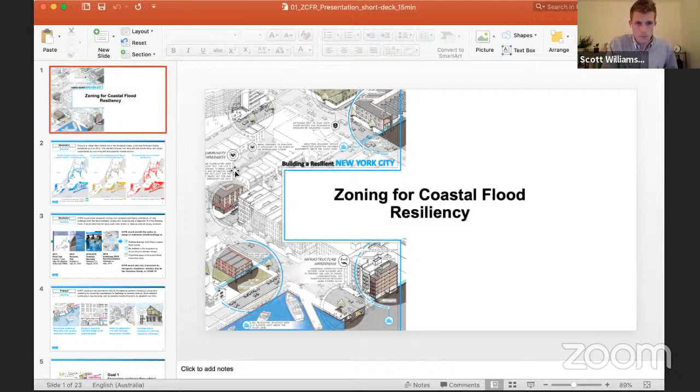When we're analyzing the city's coastal risk, we focus on the area that FEMA designates as the high-risk flood zone, the area that has a 1% chance of risk of being flooded every year.

However, in 2012, Hurricane Sandy awakened us to more widespread flooding that went well beyond the 1% area. Close to half of the properties that are technically classified as being moderate risk of flooding, or having a 0.2% chance of flooding, were inundated as well.

And with climate change, the floodplain will continue to expand. By the 2050s, today's moderate risk flood zone will likely be a high risk flood zone, an area that today is becoming home to almost 1 million New Yorkers. So some widespread implications of this, particularly for where a lot of our city currently lives.

So I suspect a lot of you might want to know how exactly this applies to Community Board 8, and I do have another map for you that I can show you right now. Let me just try and switch over to it for a second, if you bear with me really quickly.

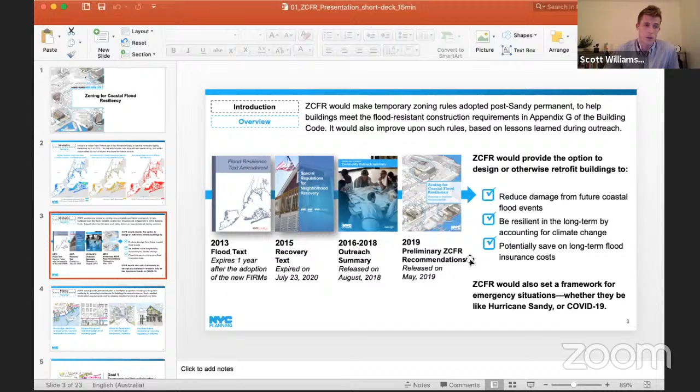So if I can give you a main summary of what this project is seeking to achieve, it's probably this slide, and again we'll make sure it's available to you afterwards. There's sort of 4 goals or pillars that this project is seeking to make changes to the zoning resolution based off of.

Just to go into the depths of that, after a long process of studying the floodplain and engaging with more than 3,000 New Yorkers on a wide set of issues, we were able to establish these 4 overarching goals that help us move from Sandy recovery to a longer-term resiliency strategy.

Firstly, we know that the floodplain community wants to be able to prepare buildings for flooding, even if they are not located in what FEMA determines to be the current high-risk flood zone, especially those located in areas that face moderate risk of flooding and that did experience coastal flooding from Sandy.

Secondly, people also want the option to raise their occupiable space a little higher than the current flood level that FEMA projects. Again, this is because they have seen higher flood levels and expect that risk to grow in the future.

When people are undertaking big investments to retrofit the buildings that they live in, they only want to do that once, understandably. So related to that investment one has to pursue in fully retrofitting to resiliency standards, the third point is important here: residents and business owners are seeking options to invest in resiliency incrementally in some circumstances so that it's more affordable. They want options like moving their mechanical equipment to higher elevations without necessarily triggering a requirement to raise or fully flood-proof the entire structure, which you can understand gets quite costly.

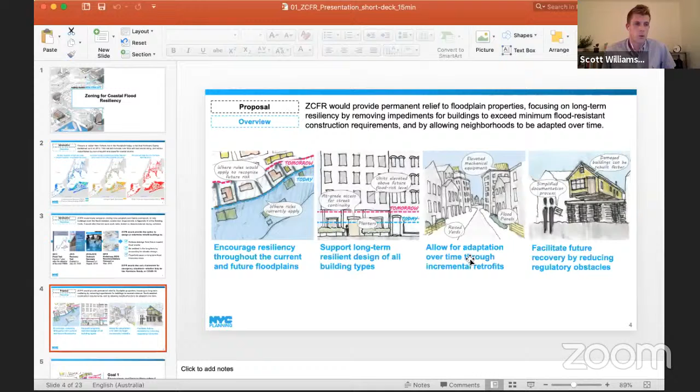So the fourth goal is, after undertaking 2 zoning updates for resiliency, we know that we need a way for the city to be nimbler in responding to future events that might require rebuilding homes or other forms of recovery.

So specifically, the next slides go through those four goals in a little more detail. So bear with me on some of that detail.

Firstly, starting with goal 1, this speaks to the applicability of the proposed regulations. It is important to note that these regulations are optional, and they would facilitate buildings to meet or even exceed flood resistance construction standards set by FEMA and enforced by the city's building code, known as Appendix G.

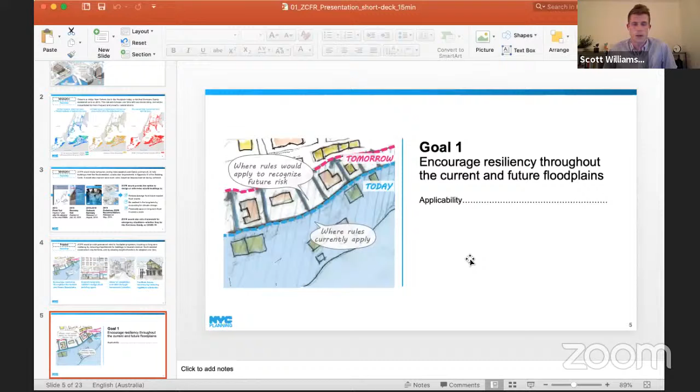Zoning for coastal resiliency would expand the applicability of the current text to a broader set of buildings also exposed to flooding in the event of coastal storms, by allowing any lot located within both the 1% and the 0.2% annual chance floodplains to have access to the proposed special rules that help enable resiliency at the building scale. The 0.2% chance floodplain serves as a proxy for the high-end projection of the 2050s 1% annual chance floodplain.

This allows the city to advance resiliency in the longer term, as it would allow those living in those areas to proactively undertake resiliency improvements, even if they're not yet required to by the building code.

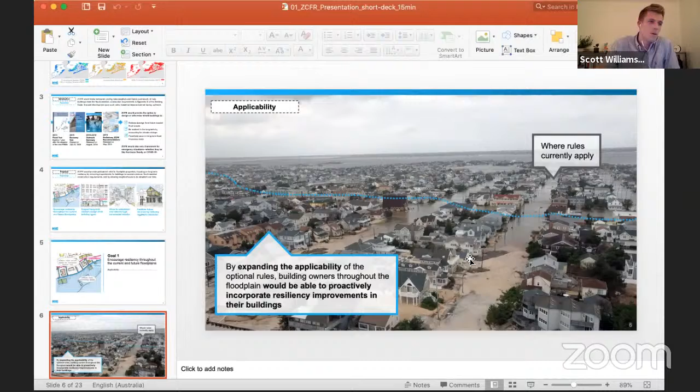Regarding goal 2, this section illustrates regulations that would be available only if the building fully complies with the flood regulations of the building code in Appendix G, and is split into 5 separate subcategories.

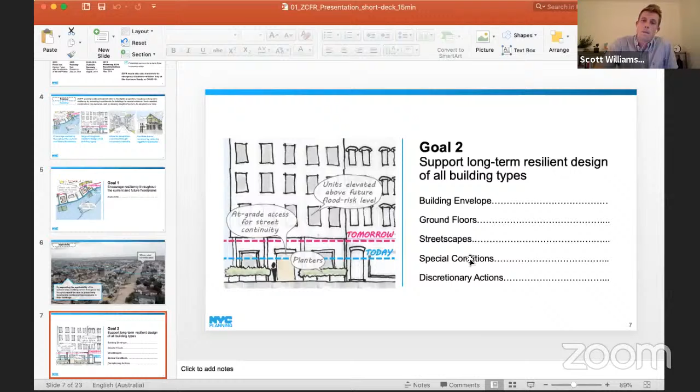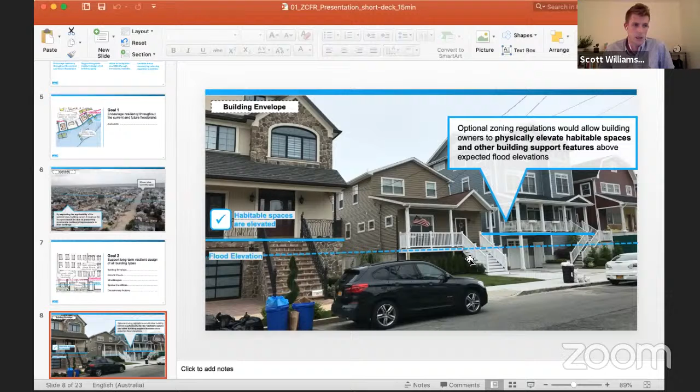Starting with building envelope, these sets of rules would allow buildings to physically elevate habitable spaces and other building support features above expected flood elevations, by offering more flexibility with bulk regulations, including height, rear yards, and floor area, so that buildings can be made resilient without putting homeowners in the hard spot of potentially having to choose between keeping their whole building versus making their homes resilient.

Regarding ground floor regulations, this set of rules would help promote good long-term resilient design of buildings and how they meet the sidewalk. Through floor area exemptions, the proposed rules would encourage internal access and active uses to be kept at the sidewalk level as much as possible, so that floodplain communities continue to be vibrant and accessible.

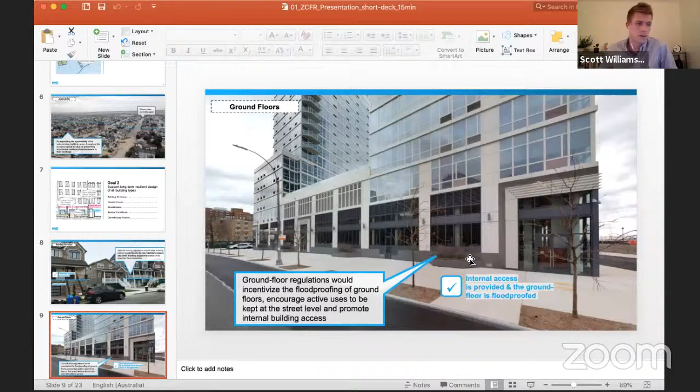As a reminder, all of these allowances can only be used if buildings fully meet Appendix G, to ensure that buildings meet the full resiliency standards. In addition, to ensure resilient buildings contribute to their surroundings, we would also mandate that a set of streetscape requirements are met, so that the ground floor level design of resilient buildings is also improved.

Now moving on to situations where neighborhoods and buildings may be old and may not fully comply with our current zoning regulations, leaving residents in these areas in a hard position when they try to undertake any resiliency improvements.

An example of that are homes that are currently located on substandard lots, which may not comply with floor area or yard regulations at present.

The proposal would set up a framework that would allow these and many other situations, in which buildings do not conform with our use regulations or do not comply with bulk regulations, to be retrofitted without bumping into zoning constraints.

Last, with such vast and diverse building stock and condition within the floodplain, we recognize that not all buildings in all situations would be helped by the as-of-right rules. Therefore, the proposal would continue to offer discretionary pathways in the form of BSA special permits, to ensure that all unique situations are enabled to meet the standards for construction within the floodplain.

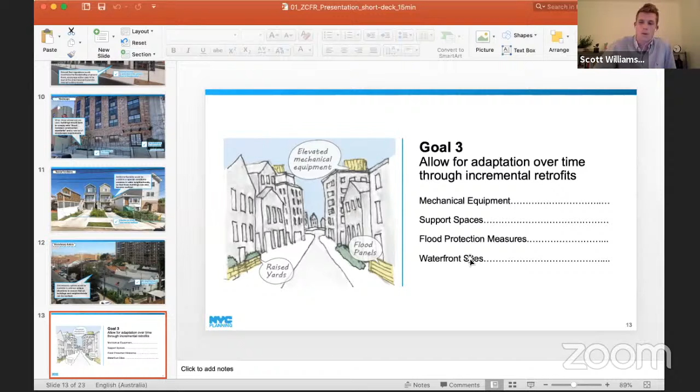We learned that raising mechanical equipment is often the first step to make buildings more resilient. So the proposal would enable more options for the placement of equipment above flood level, either atop of roofs, which is a common strategy for larger buildings, or in a separate structure, which is common for large sites or smaller buildings that cannot accommodate the added heavy load of equipment within the building or on the roof.

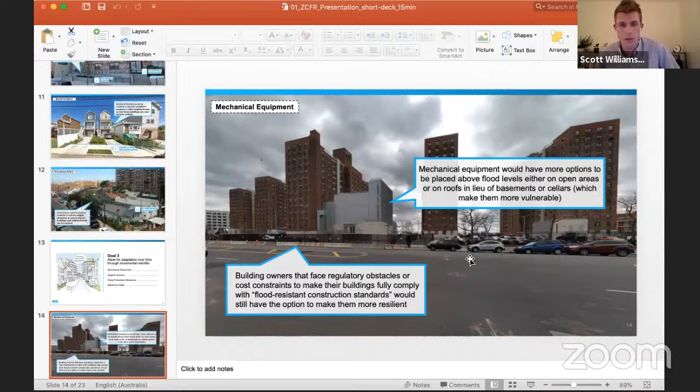So a big portion of the floodplain contains businesses that offer either neighborhood services or are part of the large industrial economy of the city. Many such businesses cannot really be completely elevated or dry-proofed, and may therefore need to prioritize what kinds of spaces they would raise out of harm's way of flooding. Such spaces can offer necessary support immediately after a storm event and reduce business disruption.

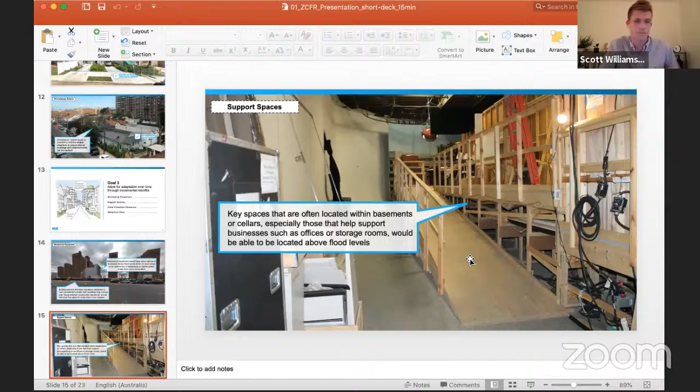The proposal would also enable different types of flood protection measures to be implemented across all areas in the floodplain. This would include allowances for flood panels and landscaped berms, and their associated egress systems, to be considered permitted obstructions within open areas. It would also allow spaces used for the storage of panels to be exempted from floor area to enable on-site storage.

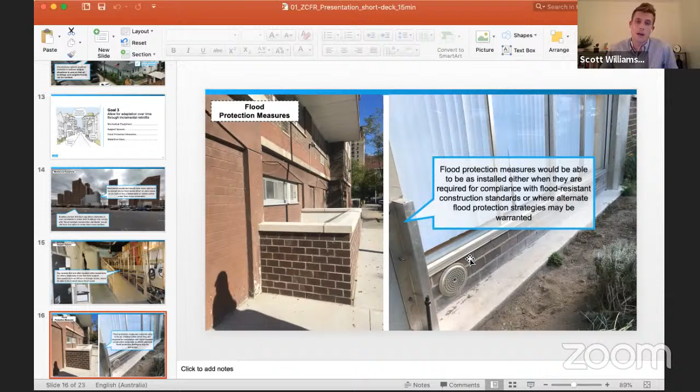Lastly, in many areas of the city, zoning requires waterfront sites to provide waterfront access, and in a wider range of sites at the water's edge, the grade of such waterfront yard or required visual corridor cannot be modified. The proposal would continue to offer flexibility for grading to occur and facilitate other resiliency measures, such as soft shorelines, to be designed to help account for sea level rise.

So now for goal 4, which is the last of the goals that make up the project. This applies differently from the previous regulations, providing rules that would mostly apply on the city-wide scale.

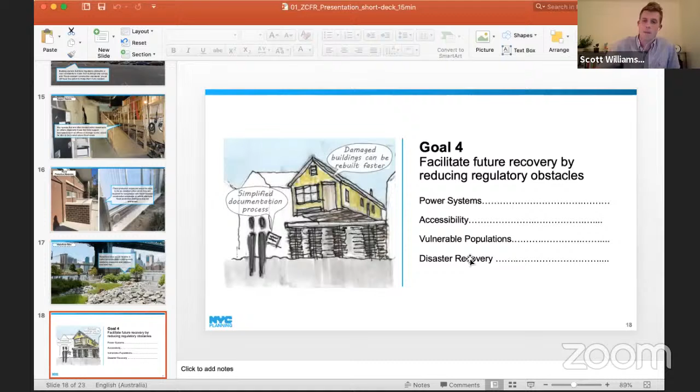Hurricane Sandy showed us how a storm's effects can go beyond the floodplain, especially across our energy grid. The proposal would allow power systems, including generators and solar energy systems, fuel cells, batteries, and other energy storage systems, to be considered permitted obstructions in open areas across all zoning districts to facilitate their installment.

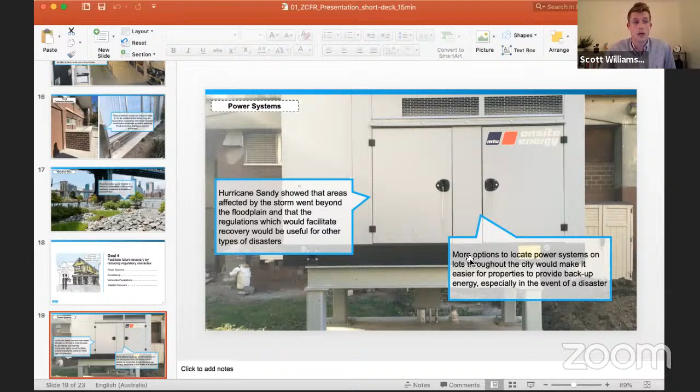In addition, to ensure all areas of the city can easily provide ADA access, the proposal would classify both ramps and lifts as permitted obstructions in all required open areas to facilitate accessible designs.

Another important issue is how disasters, especially those that require the evacuation of residents, impact vulnerable populations. Nursing homes have populations that require continual medical care, and research shows that this dependency can be strained whether nursing homes shelter in place or evacuate prior to a coastal storm. Therefore, the city believes it would be appropriate to limit the growth of nursing homes in high-risk areas to lessen the health consequences and logistical challenges of evacuating residents of these facilities.

The proposal would prohibit the development of new nursing homes within the high risk—that's the 1% chance floodplain—and other selected geographies that would have limited vehicular access during a storm event. Existing facilities in those areas would still be able to conduct enlargements for modest improvements, including those that help with resiliency.

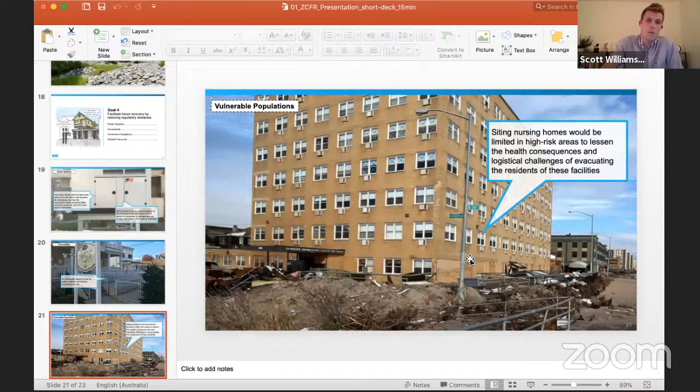The first one would be to give property owners who hold special permits and authorizations an additional term so that they can complete their original plan for construction on a longer timeline. The second would be to support businesses that do not conform with zoning regulations by allowing them more than 2 years, the current limit of discontinuance, to return to operation.

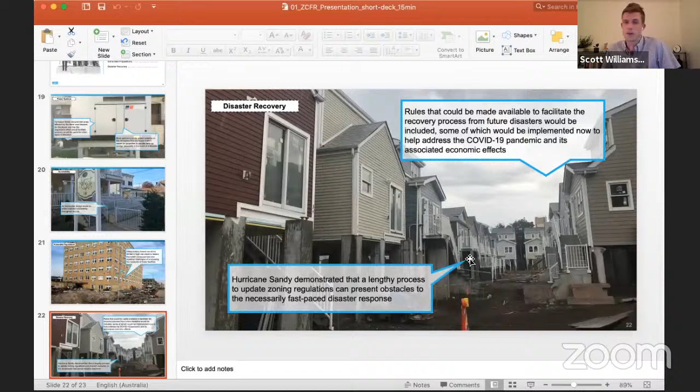In terms of next steps, the citywide text amendment that we're presenting to you today is being referred out to all community boards, borough presidents, and to the city council in the land use process. Community boards are being asked to submit recommendations to the City Planning Commission, and those are due by December 28. More information about the project, including an annotated version of the proposed zoning text, can be found on DCP's website. There's also a lot of information that's part of the referral package that I believe Will has put on the community board website as well. Thank you for the time for this update, and happy to take any questions you might have.

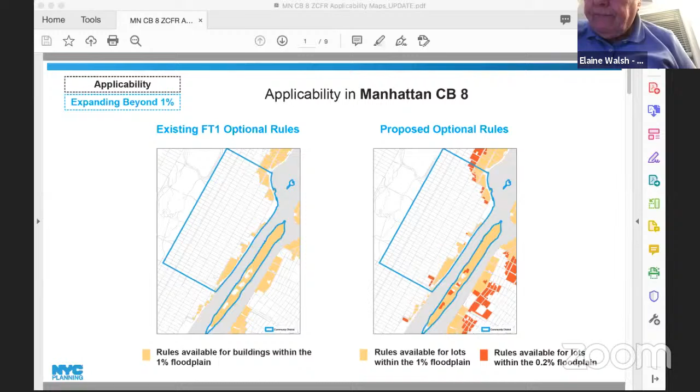I have spent, as my co-chair and many others on the board, looking at this issue. I was familiar, absolutely, with after Sandy, but what you've added is zero. And I have to say, personally, I'm insulted having sat through your presentation of a generic plan for the city. Each community is different. You need to come in with a presentation for each community. We don't have to raise the floor so the water flows underneath the building. We have serious issues in our community with institutions, with housing, with parking, etc. in that area. I have to say, sitting through this, I am so insulted by your not being prepared. You're the community liaison, I don't want to hear this again. I want to hear from somebody who can respond and tell us the options. If not, I will recommend we disapprove. Not that we can, but I am really, really insulted by your presentation and dealing with other boroughs and not coming in with what the challenges are for our community and how far up the avenues we go on this. It looks like York and East End maybe first. We need to see that from you, or your plan is worth nothing. Thank you, I'm sorry, I'm angry, and I'm furious.

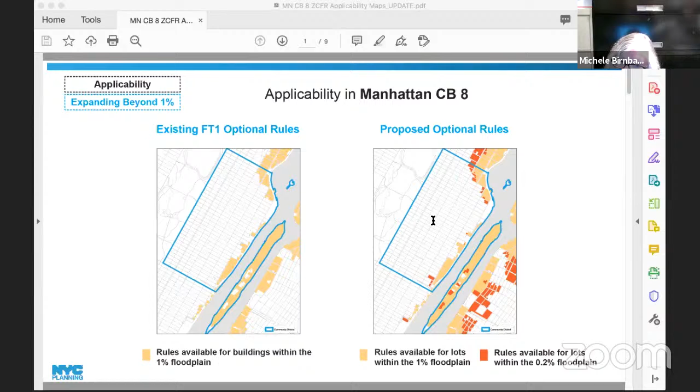I thank you for that, it's helpful, but I think those kinds of parameters ought to be made known, because if you want to encourage buildings to do this, they have to know that they can financially. Otherwise, most people just let it be until the next disaster. There's going to be very little impetus for an individual institution with a building that already exists to do something this monumental without knowing the available resources, both professional and financial, to encourage them to act before the next disaster. So maybe include that kind of information in your next presentation or in your guidelines.

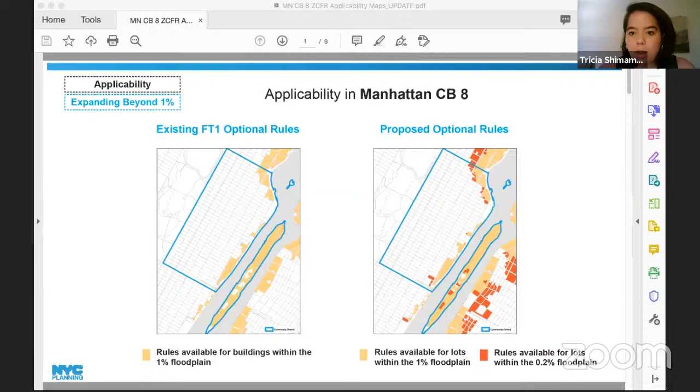Wonderful. Well first, I'd like to, I think my colleague Jennifer from the New York Parks Department is going to give the brief introduction first. Is that right, Elizabeth? No? Okay, oh yeah, there she is. I think you need to unmute her, actually. Hi, can you hear me now?

So tonight we're here to share some information about a temporary public art exhibition that the Asia Society will be exhibiting as part of their triennial, which is on view now. This will be part of phase 2. We are looking for that to be installed in March, and it'll be on view through June. Just some very quick details on the temporary public art program: exhibitors are required to have general liability insurance for the duration of the exhibition. For Park Avenue, because of the train tunnels underneath and their sensitivities, we require MTA Metro North engineer review, which we completed earlier this year, just to ensure weight loads will not cause any structural issues to the train tunnels underneath. So that's been taken care of to ensure safety all around. And then I will turn it over to Michelle to show you some visuals and explain more about the work, the artist, and the triennial.